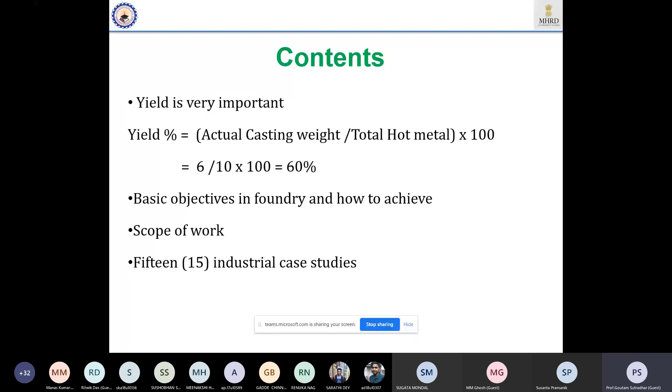If a small foundry gives a product of maximum say 100 ton per month, that means 1200 ton per year. If we think 60% yield is needed, that means yearly he is producing casting of 720 ton. Then the rest, what will he do? Will he throw it away? No, he actually has to remelt it. So out of 1200 ton, 720 ton he can sell, and 480 ton he is rejecting, but again he has to remelt it for further use.

So it will take cost. It will again cost about 48 lakh, that means 4 lakh per month. My idea is that if you want to reduce this loss, then what you have to do is increase the yield.

Similarly, in another way, with 60% yield, still getting 10% rejection, maybe due to sand, maybe due to pattern, maybe due to metal, maybe for shrinkage or whatever defect, say 10%. That means the person is basically getting only 50% effective yield. 60% yield from the process and 10% is rejection, so minus 10, he is getting only 50% yield.

Now the question is, if I can decrease the rejection to 5%, that means average improvement is 5%. That overall improvement means it is earning. So simply it is a calculation. If you make some improvement of yield or rejection, that means also it is an improvement of productivity. I will not take much time on this.

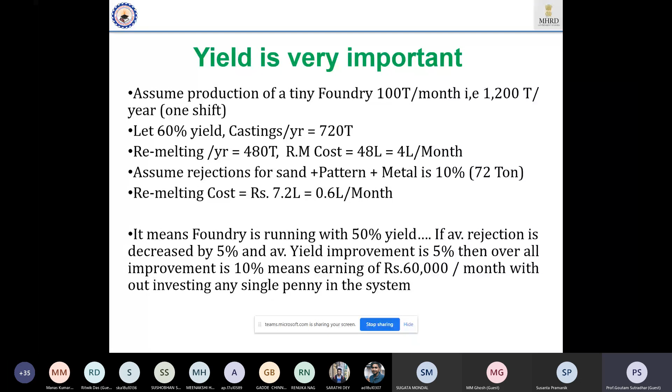Let us go to the actual field. Before that, I am telling you that casting is actually like a baby in a mother's womb, we definitely say, from the pouring to the end of getting the casting. Because when the casting comes out at the knockout, or at the time of fettling, only then can I conclude that this is giving a dimensionally sound casting.

But to get a defect-free casting, it is really challenging, particularly for any material, particularly for steel, particularly for stainless steel, particularly for SG, particularly for aluminium. So what are the basic things I will consider?

I will consider the major thing is proper placing of riser. I will not say much on what a riser is, I assume you know the riser. Riser is one thing. Riser is actually extra metal which is provided into the casting just to compensate the shrinkage, and it should be placed in a proper place and with proper size.

Then apart from these two points, runner length is also important. Then the total feeding system, that means cross section of the riser and runner, which is known as pressurized and non-pressurized gating. That detail you can get from any books, or I will give my email address at the end. And then sand related issues, sand entrapment, and these conditions. So these are the basic things I am giving you.

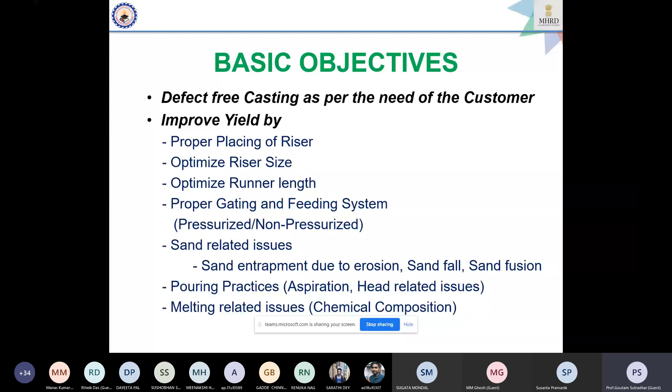After that, I always analyze each and every casting which gives a good result from any foundry. So almost, I think not less than 12 years back, one casting I got, and the company told me, sir, this is a casting which is used — you see, this is big, it is used in a very heavy earth moving element.

You see, it is just like a bearing, a bearing knee type, and this is just a housing. It looks so small, but its finished weight is 250 kg.

Understand? Now what is the problem? A huge problem was coming. The company told me they want to reduce rejection and improve yield, because this is only giving a yield of 46% and rejection of 25%.

That means 71% gone. So the company is only getting 29% sellable castings. This is the chemical composition, I am not going into detail. Now let me tell you what they are doing.

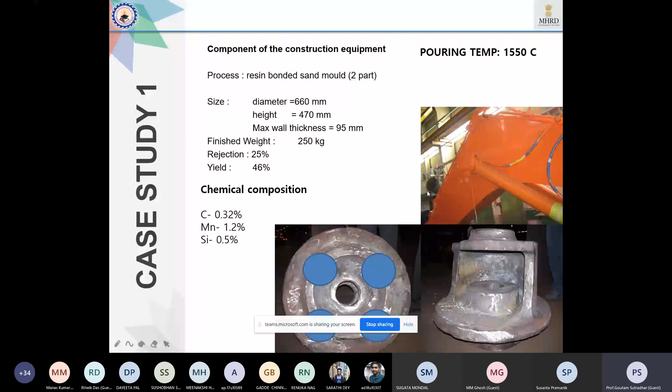First, the pattern is the most important part of any casting. So I tried with this, to see what is the volume of each riser. I made a solid model and saw the ingate is oriented 90 degrees. So assume the total is the mold, and this is the negative part.

That means it is to be filled up by material. So when molten metal comes feeding from the sprue, it comes here, its velocity increases, and it will directly hit this inside core.

You understand, it will be hollow, so there should be a core, and the rest which you see as solid is the hollow part from the mold. So when the material strikes any solid part during its molten condition, it splashes like this.

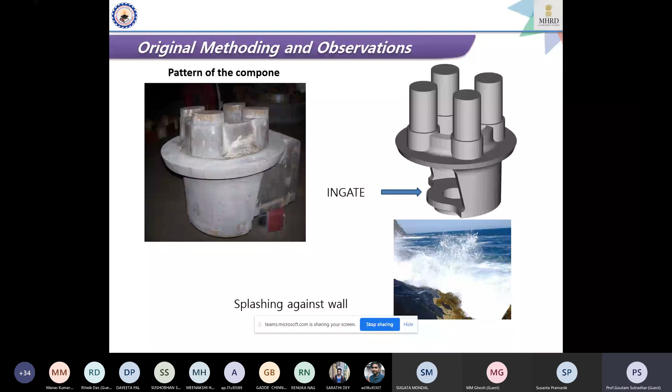So according to that, what is happening now? They are getting a huge amount of shrinkage in this part, particularly at this wall's central part. If you see in this part, there is a huge portion that is unfilled.

So then what they are doing is cutting the thing and then grinding and finishing, and after that a huge amount of rework has to be done, a huge amount.

So what exactly did I do? I first started working as per their condition. Then I thought, no, it is actually on the flange. Just see carefully, it is on the flange.

So on this flange, after knocking out the riser and then grinding work to finish it, it takes almost a minimum of 8 to 10 man hours to finish one casting.

This is called the rework, and after that they send it to the machine shop. As I told you, 71% is lost, 29% is the actual sellable casting.

So now what did I do? I shifted these risers from the flange just to avoid, or reduce, the fettling part. I shifted it a little bit, and I saw this is coming out of the casting.

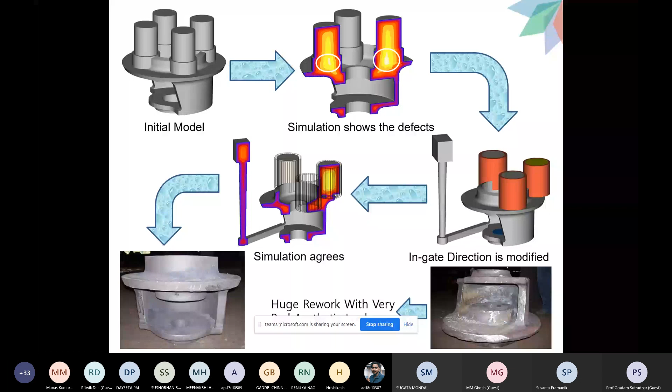Then what is the result? The actual metal poured before doing this work was 540 kg. But after this change, it becomes 465 kg. That means 75 kg savings I have made on one trial for one casting. Now, if we make 100 castings, that is 7.5 tons of hot metal that could be saved.

So the yield was 46%. Now it becomes 61%. So improvement of yield has become 15%.

So this work definitely took me almost about 6 months, because it is not my full-time job. From my teaching, and according to their schedule of manufacturing, I have to go there. I have to stand on the shop floor. I have seen the difficulties, understood the problem, and solved the issues.

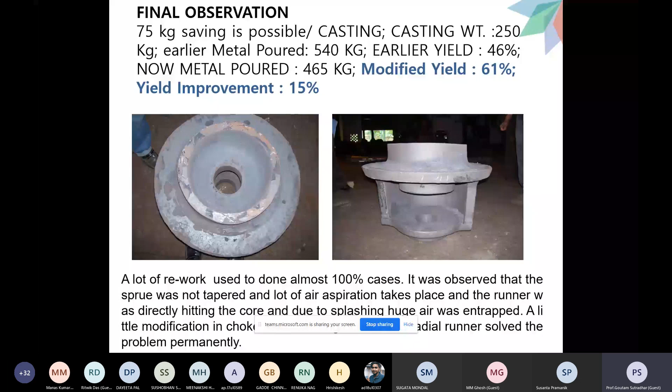So this is another one. I am just asking, is it interesting to the audience? Yes, sir. Okay, now this is my second component.

This is also a very good experience I am just sharing. It is a component used in a textile machine. The machine is being exported by an Indian company. It is basically Calcutta based, but their main factory is in Delhi, and Hugli in Calcutta.

So this component, just see, this is a part. It is a flat plate and then a cylindrical thing, and in between there is a rotating bush, a rotating spindle. After that a plate is there, it is fixed. So this surface and the actual body of the machine should be perfectly matched, otherwise it will be rejected at the spot.

Now, what is the history I got? Particularly, I am just giving you the SG iron composition, what it was, but I'm not going into details. When I went there, I remember it is a fact, it was in 2012 when they came to know that there is a person who could rectify these defects.

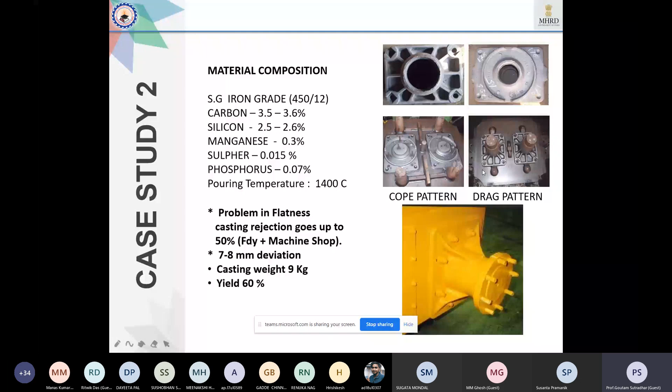So now, what I have seen, when they are pouring, this is the pouring site, there are 4 risers, and this is basically 450 by 12 SG iron grade. I thought about what they are doing, I have seen the simulation, and from the simulation I understood that these risers are not at all useful. And not only that, if these risers are not useful, this zone will be very much hot, because this riser is the last part of the casting to freeze. As it is hot, it will create 4 big hot spots in the sand, which will be hot for a longer time.

What is that? Due to deformation, even after solidification, due to the hot temperature of the sand, it is slightly deformed. That's number 1. Number 2, as these are the last points to solidify, when it sinks, it is taking some metal from nearby. Sometimes metal comes out, and due to that there is some taper or depression, a sinkage visible from the top surface. So I have seen this thing.

Then I thought, you need very good common sense. I thought these two ends, the dimension deviation should not be more than 4 millimeters. Now, the sand density is about 1.8, but the casting density is 7.4 or 7.5. So definitely, if the molding is not proper or hardness is not same in all places, then it will be deformed.

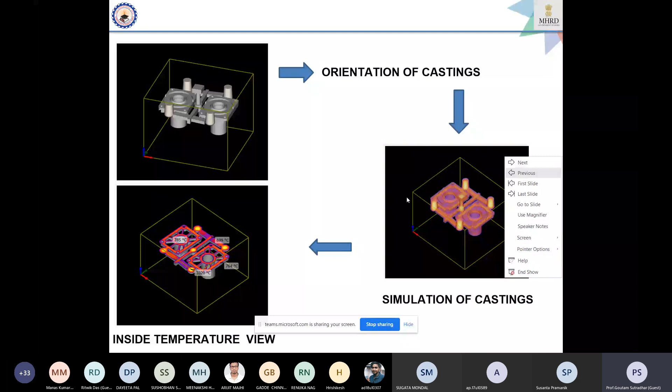So what I did, I changed the orientation. I made the orientation like this - that means I changed it so the top box becomes the bottom box and the bottom box becomes the top box. So this flat part becomes the bottom, and the cylindrical part becomes the top part.

And see, there is no riser. I didn't put any riser because I thought, let me see. I talked to the entrepreneur - let me allow at least 10-15 castings, I will see. When I did it, the shop floor supervisors were laughing. They had thought there were 4 risers needed, and how can this professor do it without any riser, because for the last 5-6 years they've seen that a riser is very much essential. Some people increased the riser size, somebody decreased it, but ultimately there was no effect on the rejection level.

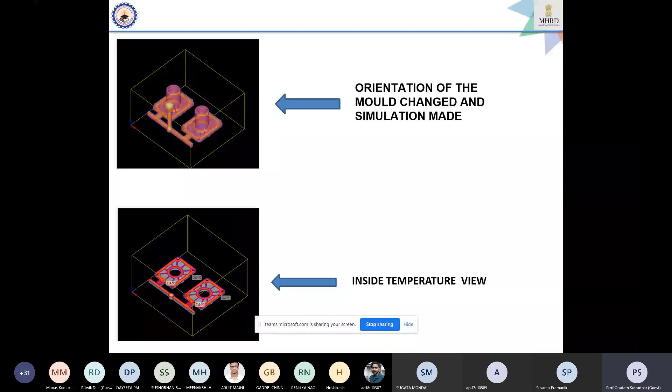But fortunately, this first casting - I am happy to say it is a totally sound casting. And from this image, you can see there is no riser. This is a match plate, I have just removed all the risers. So this becomes one of the first riserless castings of SG iron, each weighing about 9 kg.

And not only that, the gating is modified. Yield becomes 85%. Deviation is controlled under 3 millimeters. Rejection is less than 10%.

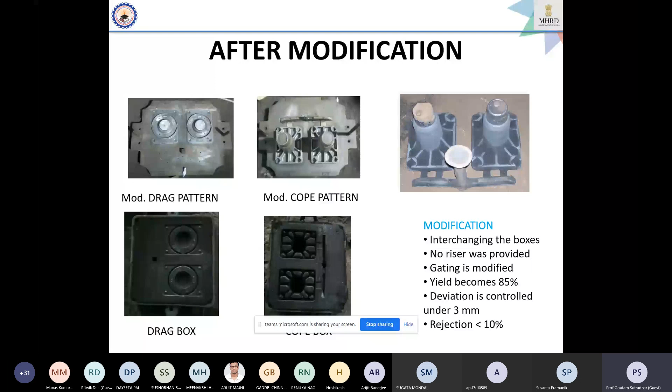This is another one, a very big casting, about 4 to 5 feet diameter, a very big housing - an axle housing. Now everything is fine, but somewhere in the total casting, because it's a hollow housing, there is a huge core inside. The core diameter is more than about 3 feet - it's a very big core. And the axle is very thin, maximum 12 to 15 millimeter thickness, but the diameter is very big. But there is a hair crack from one end to the other end.

So the problem was really difficult to understand, what could be done, because the methoding is okay. I checked other processes, it is fine, but there is only a hair crack, and it is coming up to almost 50% of the surface. From the outside, you cannot understand, but when the customer checks, they are telling it is a hair crack.

So now, this is the trick, and this is the experience. What I did - I understood that the problem may be due to the core. Then the medicine was just to increase the collapsibility of the core.

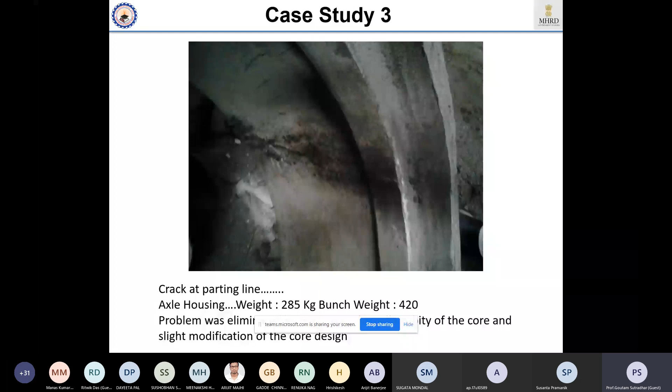stopped. So it's just a concept of what to do. I have not spent any money for that, only some sawdust was included. So this is one story. Now another story is this.

There is a particular component.

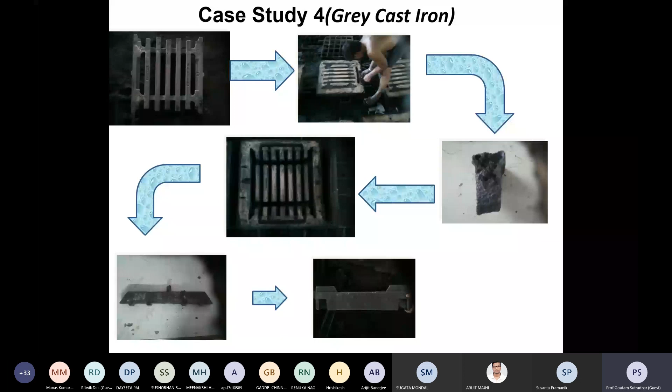So what I did after that, I understood the problem and they accepted this thing. And this is the final product I just showed you, that there is no such issue, see this. If you can magnify this, you will find out the metal is coming, entering through this, and there are no bad elements in there. After machining also, nothing came up. So this has been passed.

This is a product, also a railway product, very costly product. It is a grey cast iron product. It is from a casting company, I can remember it is in Asansol. I'm not taking the name.

And the same thing was happening. No, watch it, sorry. This is also grey cast iron. Sorry, it is also one sort of manhole cover frame. Same type of thing. They are getting some slag at a particular place. Very typical, very particular place during machining, I think in this place. This was something coming and the casting is ultimately rejected.

What I did, I did the only thing. See, this was basically their feeding system. The problem is, you just check it. See, sometimes it is not there, the extension, I think it is not there. So initially they did not make any extension of the runner.

It is an inside runner. Normally we are putting the runner on the outside of the casting, but this casting is very big, so if I make the runner outside like this, the yield will be low. So inside they are making the ingates like this, and this is one position of the sprue, second position of the sprue. So two gentlemen are simultaneously putting the hot metal in this. So I said, you are doing some mistakes because there is no

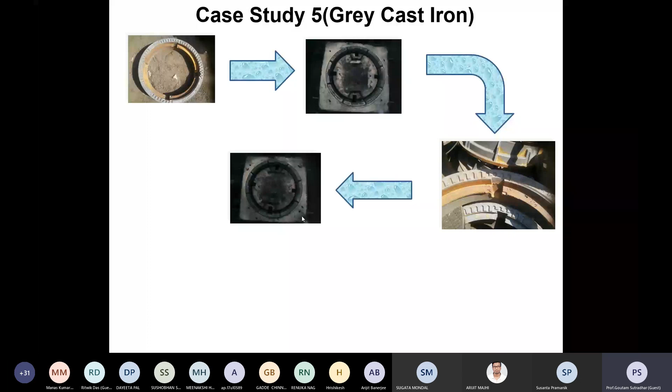So this is another case. See, this is from an Asansol casting unit, about 6 years ago. This is a component of grey cast iron, I think, what I can remember. This is called one sort of, this is about 45 kg weight for a single casting. So I have to first check what is going on in molding, what is going on in the methoding. So they are saying there is no runner work, this is the ingate, and from the top they are pouring. This is a point, okay.

So initially they are sending like this. I just changed the ingate position - you just check, it is just radial direction. I made the thing in radial direction. So the first example, think of it - metal will go inside and flow like this and fill the mold. So first I tried with this just to show them that, when I change from here to here, that 100% casting is not okay. I'm telling you frankly. Then I increased this part.

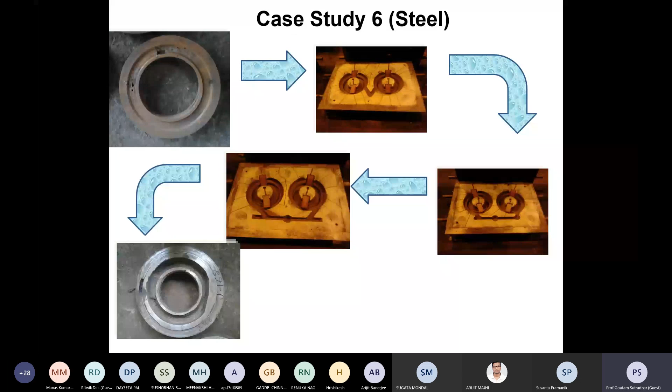I don't know, Dr. Pramanik, is it interesting? May I move further? Yes sir, it is very much interesting, and students should also hear this - we should go for more case studies. So please continue with the case studies, sir.

See, this is the experience from my last, almost 2001 to 2018 - you can see, before joining. Still I am doing this thing, but now it is just like fun. It took more time earlier because I was not running to the foundry from Imphal to any part of the country, but nowadays technology is very fast. So they are actually helping me online also, by video also, but I have to carefully see when I am really free for that.

So again, I want to show a very good example - it takes even more than a year to solve this issue. Case study number 7. It is a small worm gear, it looks very small. In a match plate there are only 4 castings. It is a worm gear, material is steel, so far as I can remember, low carbon steel.

Even after simulation, just think - out of these 4, one of the castings is getting sinkage at the middle, and in the middle there will be a key slot, because this worm gear will be fitted in a shaft, and then a sunk key is being fitted. Now if there is a small discontinuity or hole or any shrinkage, even at the size of a mustard seed - that means 1 millimeter or 1.5 millimeter, even 1 millimeter, I'm telling you - it is a reject. I think it's a handle of a lathe or some machine tool, I think.

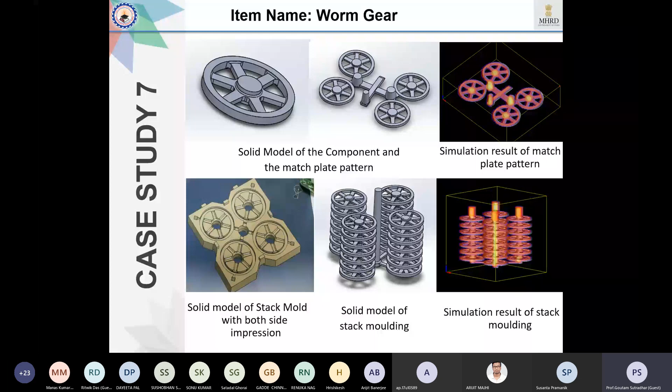So after this simulation, I was really inspired, I was excited. Then I told the entrepreneur, let us go for the practical trial - first I did the simulation. So this was previous, now this has been made by the core shooter.

And similarly, one after another, we put together and make - see, 1,2,3,4,5,6, you see 7 boxes are there. This is the middle pouring, these are the ends where the material is coming out. So we still put a very small riser with some sleeve so that the metal can stay liquid for a longer time.

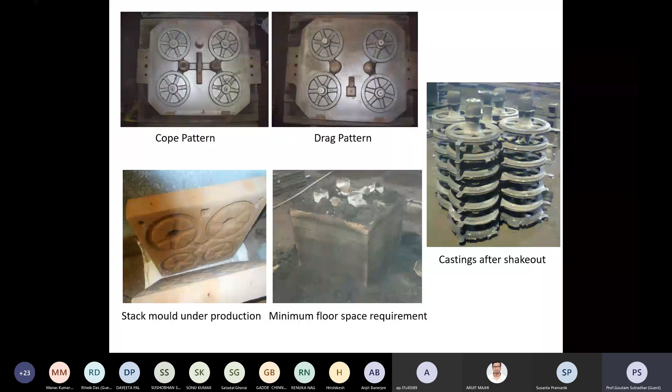After checking, I said don't cut it - cut it in front of me so that I will see it. Then after that, see, you can understand what is coming out. Previously, one bunch meant 4 castings, with actual weight with runner and riser of 20 - that means yield was 48%. Now with the stack molding, it is only 100, and you are getting 28.

You are getting 28 castings.

I thought the yield may be decreased. First I calculated theoretically, then I said it may be around something. So ultimately when I did the cost analysis, leaving aside other factors, it is not much different. If you want, I can show it to you.

So see, ultimately I saw the material cost, everything we have checked, but that rejection is almost nil. I don't know whether I can show you the next page.

Sorry, in this analysis you only see the total cost and other things, shot blasting cost, everything. But I am getting the metal cost rejections. I forgot to include it, but rejection is absolutely nil. This they have been adopting for more than 6-7 years now.

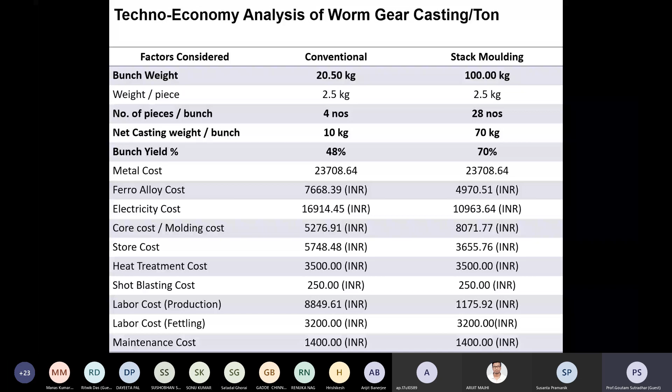So this is another example, a very typical thing. I don't know whether you understand or not. This is actually clipping with the fishplate type. This is a gap where the rail part is there, and it is just put into that.

This is used in American railway, and this part should not be disturbed in any way. And it is so deep that you cannot machine it after casting. Then cost.

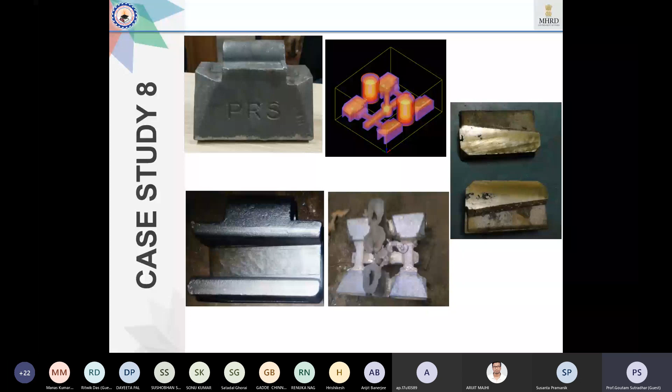Then again, as before, we thought if we could do it in this fashion with a bunch of things, and then let's see, because yield we can improve. So first, this is our first simulation where we made one casting, one riser, one sprue, just to check.

Just see on the left this thing. Then I cut it and saw it is absolutely okay, no problem.

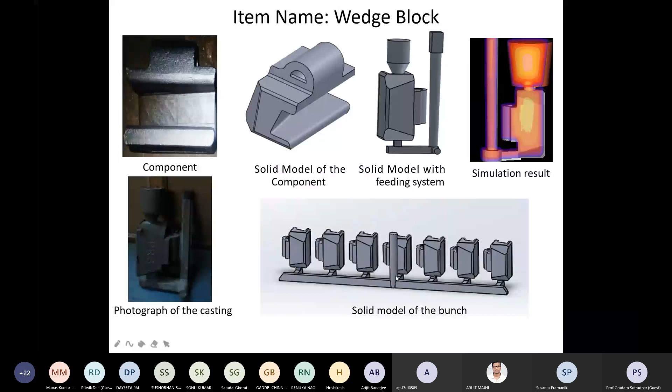Then we made 7 castings with a single sprue and runner, and put the riser every time. So this is a solid model of the bunch.

Then see, I got the simulation, but again I'm seeing there is a hot spot. But then what we did, we changed the - see, you have seen that. Then again we changed it, we did many researches on that.

Then I said, see, if it shows yellow, maybe sometimes it may not be correct. This is an example I am telling you, where the software does not give direct, correct direction to the engineer. So even though it was showing some yellow, I said let us try, because I could not do anything better than this. I surrender, unfortunately.

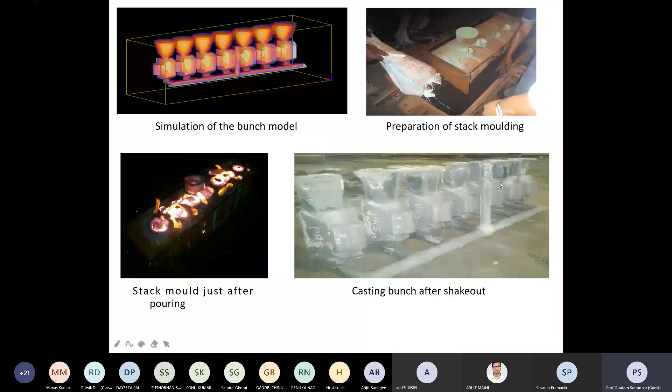This is the photograph I took when the casting was being taken. So this is the casting, and you see all engravings are clearly visible. Customer is satisfied. Then I said, let's go for the cost analysis.

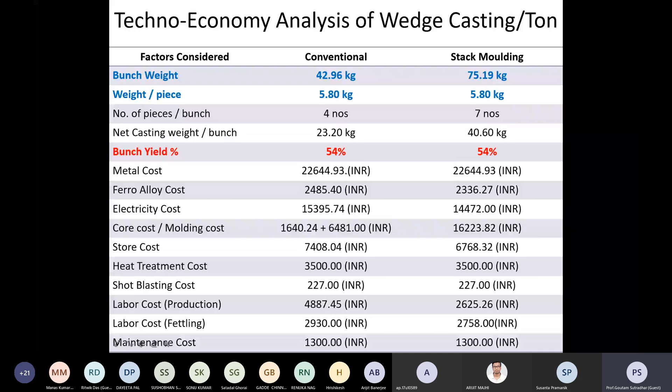See, the bunch weight yield is not improving, in the production yield, in the bunch yield. But when I looked at the rejection, I was astonished. Previously, rejection was about 30%, and it was totally unpredictable.

Unpredictable results give a very, very bad name to the entrepreneur, because some months he is doing very good, sometimes there is high rejection. So they could not fix their productivity in a standard, more consistent manner. Consistency in rejection, whatever it may be - 5, 10, 50 - whatever it is, is very important. So first I can understand, they see 5% rejection.

So cost-wise, we found it is only nominal, just 1.5 to 2 rupees extra. The entrepreneur was glad because processing time also became one-third. But I'm telling you, it took almost 1.5 years, even more, to achieve that. These are very typical experiences in the shop floor.

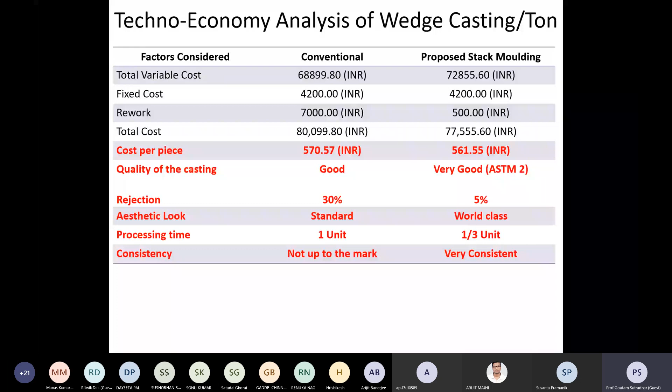If you are curious, this is one casting. The company is far away from this place, near Kalka. They somehow got my name from the Indian Foundry Journal. If you go on some Indian Foundry website, you may see my name listed as a casting simulation expert or something like that. That was some time back, I don't know if it's still there.

This is a component from solid modeling. It is a steering case of a Bolero car, and it has a very, very complicated design. Complicated in casting terms means the surface or thickness is not consistent.

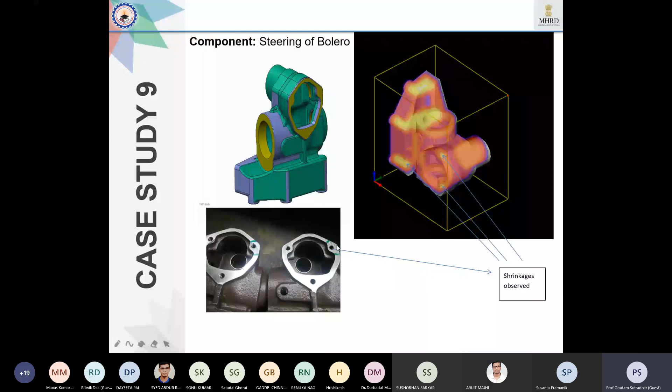So I visited the factory. This is me standing and taking the photograph. Then I said that first of all, this is not correct. But they did not act on it.

First of all, I'm telling you frankly, any shop floor person, when they know he is a professor, they don't know how much shop floor experience I actually have. So first they deny it - 'No sir, kaise hoga? Ye nahi hoga, ye hoga.' They say this problem will come, that problem will come.

Then I discussed directly with the owner. I said I have to take some risk, you have to take some risk too, and I need the chance to operate on this particular issue. If you are ready, I will go ahead. If you are not ready, forget it, I am not taking this case.

So first I told them this thing is wrong. You can ask me, sir, why do you say it's not correct? Because I have seen that these are the areas where the metal is entering. See the cross section - this is not uniform.

Uniform versus non-uniform cross section means, as an engineer or science person, you can understand the velocity of the metal at this place and that place are not the same in the same casting. So this part can fill easily, while this part will fill late. The velocity at this part is very high because of the reduction in cross section.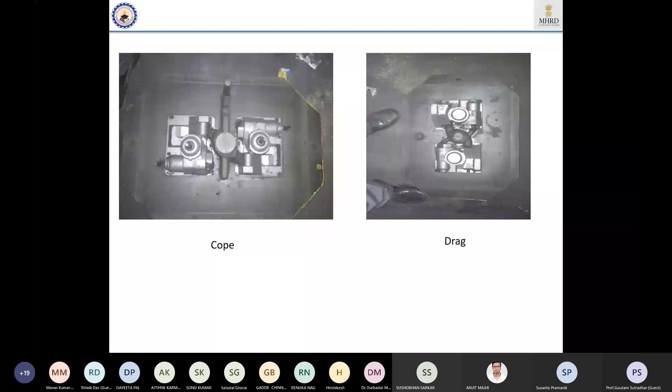So after that, I changed the design. You see, there is no such difference now - it is uniform, this and this.

I said that since the casting is very critical, with difficult cores and a huge amount of metal, I cannot think about yield from a match plate point of view, because this is a very safety-critical item. You have to increase yield by reducing rejection instead. So I told them I cannot give much yield in that - whatever you are currently getting, I cannot improve that part.

The man then said, if you reduce my rejection, I'll be very happy. So I said you have to create an exit path - because huge gas is generated due to the larger volume of core. You have to make a passage for the gas to escape easily. It's nothing complex, just a plate of 2 millimeter thickness that I introduced into the design.

I told them to put as many as possible, so they did it the same day. I was there for a day, and the next day I saw what they had taken - you just take the casting, and after that they sent it, and they were very happy with that. Ultimately they said, sir, it is really good for us. So this is one story.

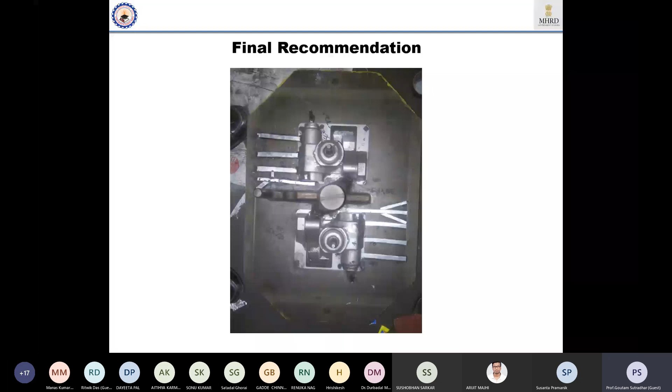This is a part which is very near from here, I think near Raniganj or some company. This is a component which is again being used in railway, for fixing the fish plate. There will be some other parties there - I do not understand exactly why it is used. It is almost 2 point something weight.

The entrepreneur said our match plate is like this, and these are the small risers here, and there should not be any defect inside. I don't think about the yield or whatever it is, but my margin is very low. At that time, this was 10 years back, the margin was only 25 paisa, he was telling.

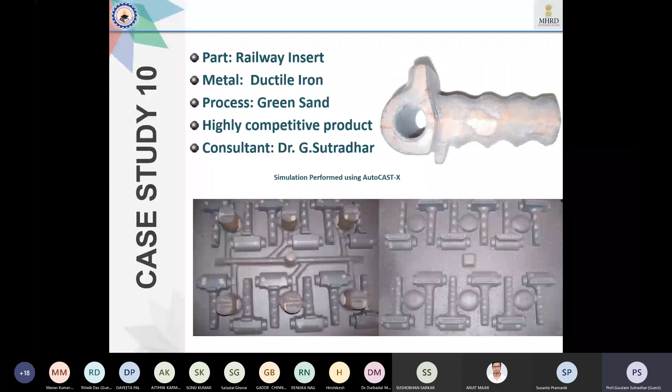Because of the huge count, the company is existing because they are supplying more than lakhs of these pieces per month. Okay, so this is the casting. So what I did - I said, okay, I'm not very sure, but if we change a little bit, I think it can work. He said, you can take any risk. So I started with this, the unmodified match plate with only 12 inserts.

Then I thought, can you just put one component in this part? But there is again a chance of entering slag, so you have to do the slag removal - a very, very good process with a very expert ladle maker, meaning who is actually skimming out the molten metal before pouring. So they said, okay, we'll try, because this is our bread and butter. If we don't improve and increase our profit, the company will lose.

So with the same match plate, I put two more inserts - instead of 12, I made it 14. Ultimately, they were very happy. I am not going into details about the methoding - I am not changing anything.

Only by chance I thought that if I make it this way, sometimes you may get scrap, but I have no choice - I cannot help you with anything. But simulation said make it metallurgical, it will be okay. If the slag enters, I could not do anything, because I have no scope of escaping the scrap from this match plate. There is no space to escape.

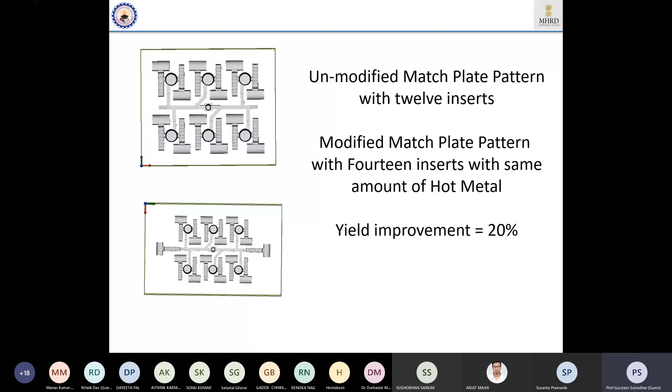So next, it is a very good story. At least if you want to finish me here, I can finish, but I don't want to get relief if I don't tell this story. This is a story maybe 15 years back, when I really started consultancy work, in 2005 or 6, I think, minimum 15 years ago.

The foundry is making that kadai, which is made of cast iron. Suddenly the entrepreneur called me, sir, I am getting kadai which is unfilled. Everything is okay. Metal temperature is okay. I said, how do you know that your temperature is okay?

He said, I am doing this for almost my whole age. When my age was 10, I am now more than 60, so for the last 50 years I am standing in the same foundry as the owner. At that time I was a child, now I am an old man. So I am saying, I know that temperature is no problem. I said, your sand quality - the same person is doing everything fine.

Then what is happening now? I am trying to fill, but it is coming jali - meaning it does not fill the full surface. Okay, I am not going into details, because I do not know exactly how it is, just a hemispherical shape. One is the positive part, another is the negative part, and the mold is made like this, and metal is being poured.

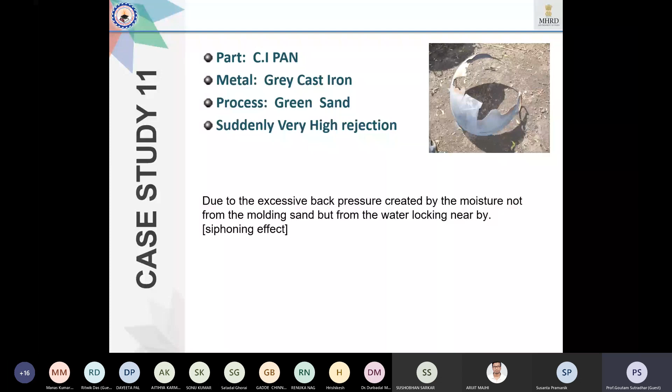So, gentlemen, another 4-5 cases are there. Okay, hello Professor Paramanik - am I close here, or are people getting really interested? Another 5 cases are there, but they are very small. So should I complete it, or should I move to the next slide for the smart foundry topic, or close it here? Smart foundry I will take only 5 minutes.

Can you ask your students whether it is interesting, or tell me yourselves? Otherwise I will close down in the next 5 minutes. Yes, the students are there to answer - you just ask them, it's your students, not my problem, you're the teacher, ask them if it is making any sense. Then I will continue, otherwise... Sir, another five? You continue this for 2 or 3 slides and then move on to the smart foundry part.

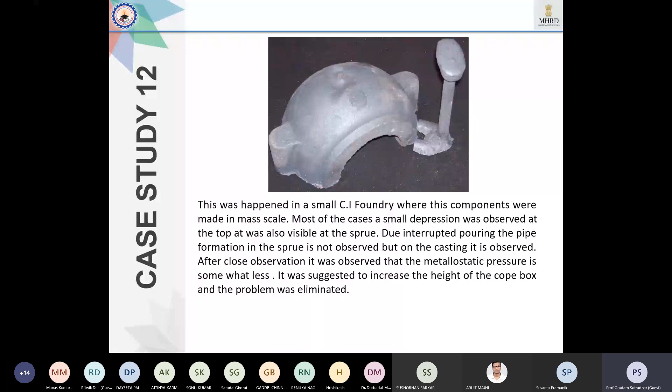This is inconsistency in mold pouring - sorry, mold consistency, meaning the compactability.

I think people who are reading foundry know this. Sand compactability should be around 45 plus minus 2. If the compactability is not there, compactability is the index for making the uniformity of the mold box.

If it is not there, you may get, it is also a component like a pan, the kadai. It may be making hollow like this. From the outside you cannot understand, but when you crack it, in between you will see it is not filled like this. This is because of compactability, because cast iron has graphite formation and tries to expand, and when it expands, it creates this type of problem.

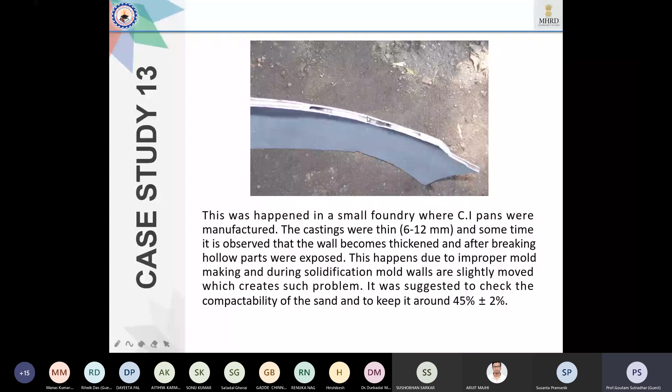So again the same problem I said in case of hair crack applies here, you have to improve the collapsibility of the core. This is the last case study, I think.

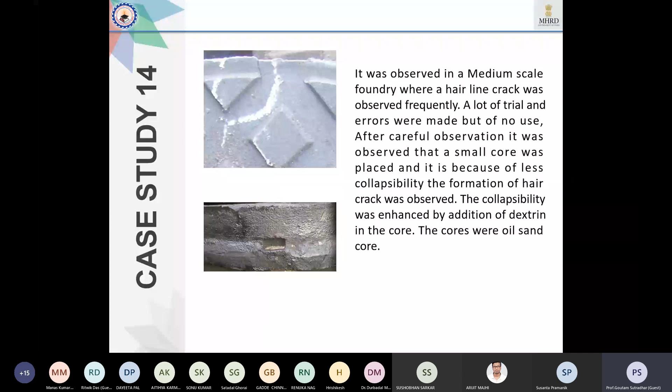This is my first consultancy in my life, in 2001 or 2, I think. I just came, it's a long story, I'm not going into that. Only thing I have seen is that this is a match plate.

At that time I was not doing simulation, I was doing hand calculations and other things. But that company was doing simulation. In 2001 I first saw, in Howrah there is a foundry, it is now a very big foundry, but at that time it was very new. I saw simulation at that time.

I saw one very peculiar thing: everywhere they thought they were getting some shrinkage, they were putting some sort of riser and again some knockoff like that. So an enormous number of risers you just see. Now the casting distribution was haphazard, no proper distribution. Metal is coming here, one side producing 1 and 2, other side producing 1, 2, 3, 4, 5, 6.

Ultimately I thought the yield is 47%. Not only that, it goes down because high shrinkage is also coming, at least 1 or 2, because this number of risers is actually working enormously, but with no prediction, nothing.

So this example, I found that in nature, if water is coming from different sources and merges somewhere, then some splitting takes place. As I said in my first slide, the behavior, the flow inside the molten metal inside the mold, is very very important. It is only common sense, I am not going into any theoretical issues. That is why I'm telling you, I will just give the story and experience of my life.

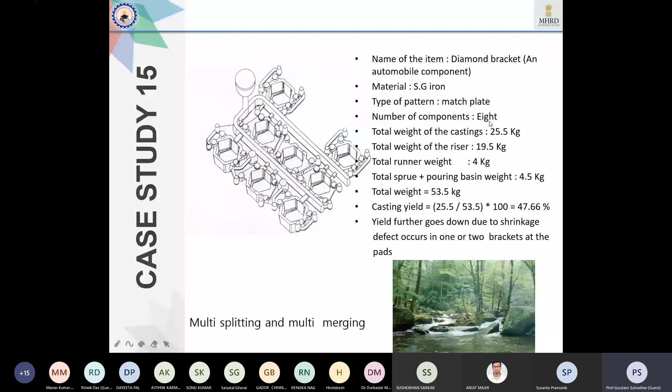Instead of this, their casting yield was this, and the number of components they were producing was almost 8. Now I am making 7 components, but with improved yield and no shrinkage. So ultimately he has taken it.

So I think these are some riserless castings I have made for SG iron, particularly 507 grade, and see the yield. These are all done over almost the last 4 to 5 years, from say 2014 to 2018, before joining NIT Manipur. So this is the thing.

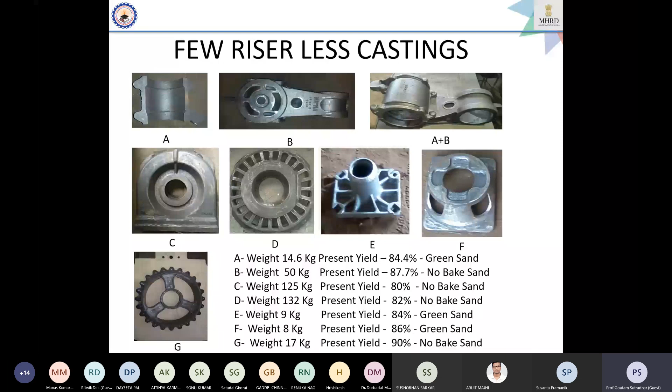I think I am coming to the end of this chapter. If you are really interested, I'll show another one slide for just 5 minutes, if you're interested, it is on industry.

Dr. Pramanik, I'm just giving 5 minutes for this. Yes, IoT, sir. Yes, sir, yes, sir. You continue with the smart mode.

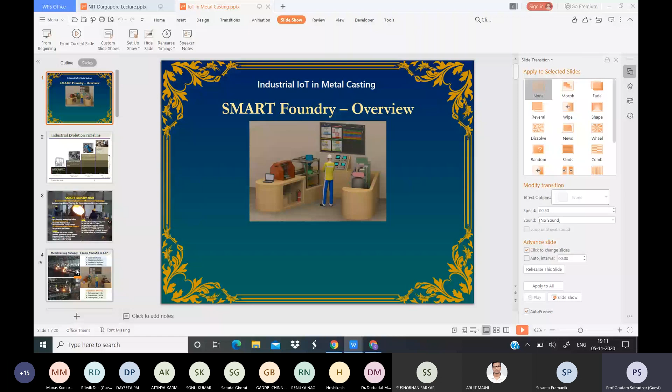This is smart - it means it is not that it just looks smart and other things. Smart abbreviation is that, from the third slide I can show you, sustainable metal casting by advanced research and technology. Now, I don't know whether you understand Industry 4.0. Industry 4.0 means Industrial Revolution 4.0.

When our forefathers started their life regarding the earlier part of civilization, they could do everything by their own hand.

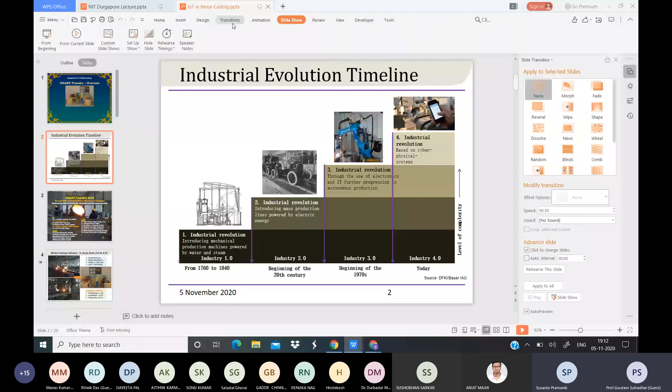When mankind first starts, that mechanical production with machine powered by water and steam - the steam engine just evolved, and then people started using the steam engine for machines. So this is our first industrial revolution.

The second industrial revolution came about almost 100 years after. At that time, people said if production continues like this, the component production rate is not very high, so we have to go for mass production. It is basically repetitive production, with main concentration on repetitive production.

Then again almost 70 years after, the computer is attached with the machines - machine tools, CNC lathe, CNC milling, CNC drilling, CNC laser. Now it is becoming computer numerical control machine. Initially NC, then CNC. When this era, when CNC came into the picture, we called it Industry 3.0.

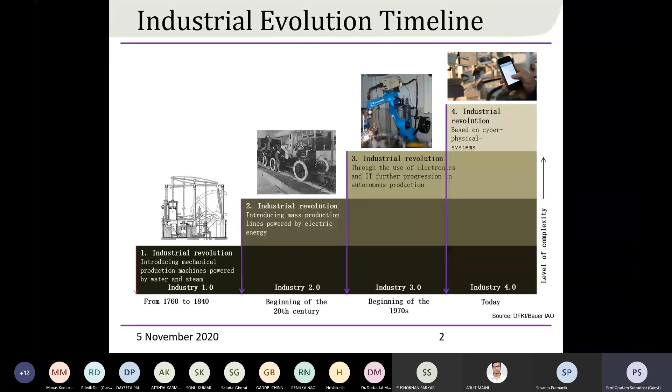In India, truly speaking, this is a project given to a group of faculty members, and I was a part of that. There were 4 principal investigators and 16 faculties from different engineering colleges and institutes - IITs, NITs, Jadavpur University - with 4 PIs and 12 co-PIs. I am just showing you, for your information, the 4 PIs and the co-PIs.

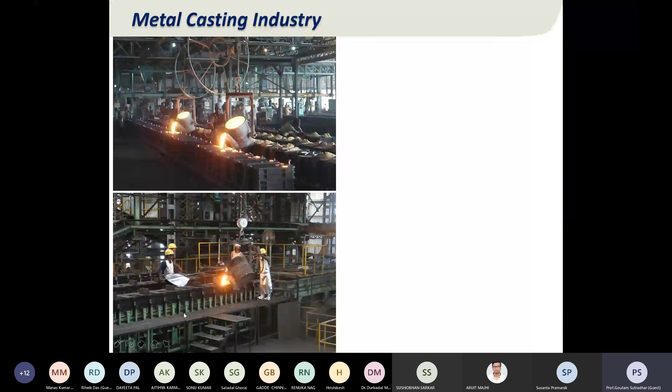After that, some industry partners also joined, with 10% funding coming from industry. Now I am going to show you the most important slide.

See, this is the industry even 40 years back, and even today it is still moving like this. Nowadays it's a little bit modernized, pallets automatically moving in one constant place. So you can see the change from here to here. But now our future industry should be like this.

This is our project. It is not completed so far. Here with 16 faculty members and about 30 research workers - JRFs, now SRFs - still working. It is already in its first phase, and the government's DST has already seen this thing, but only a demo version has been shown to them. It was a zero version.

From the starting it's a CAD model, from that a pattern is made by 3D printing, and then a mold is made by no-bake molding, and then the methoding could be checked by simulation, because it is part of digital manufacturing. It will be manufactured, it will be simulated, and we get conformity of that.

So this was the zero version at IIT Bombay - this is the tabletop furnace, an induction furnace of 1 kg capacity. This is the mold box, manual, and if you pick this thing, metal will drop.

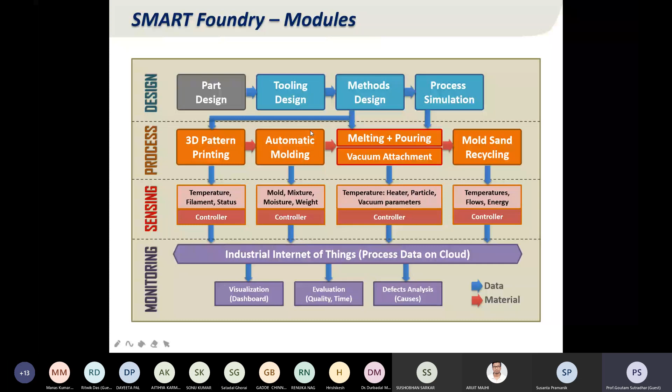But after that, version 1 came. These are the background and design parts, all clubbed together - the sensor part, the monitoring part.

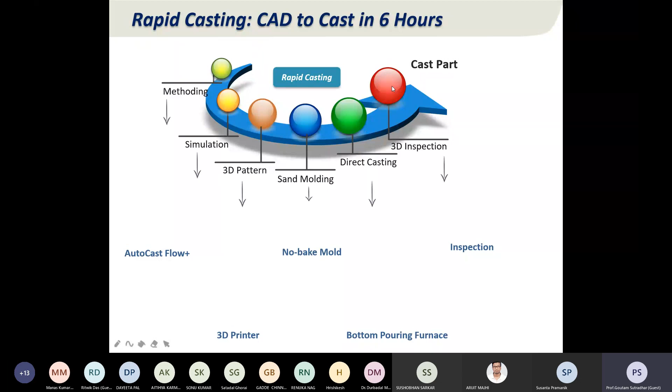Now the last slide, just 2 minutes I will take. In this rapid casting process: methoding first, then simulation, then 3D printing, sand molding - it is no-bake sand - then direct casting, and then 3D inspection. So far this part is not being added into the actual system; it is our plan. I am not going into details.

I'm going almost to the last slide, just to save time. So this is the component - it's a micrometer screw gauge, because this system was particularly instructed by our DST that initially you should go for only two alloys, aluminum or magnesium, because they are low melting alloys, and you have to take very good precision casting.

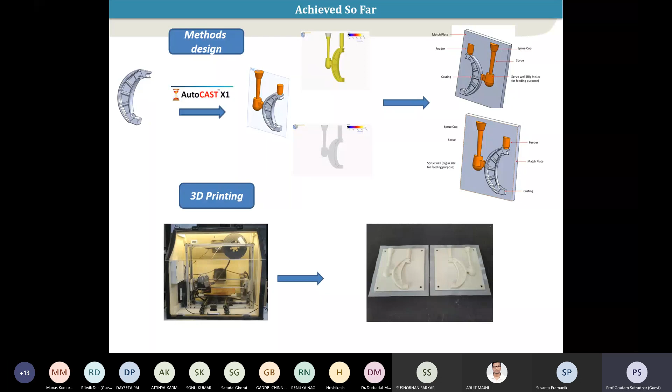So this is the body. This is the casting. This is the modeling after the simulation is done. This is the 3D printing, done indigenously by some of the participating institutes, and this is the no-bake mold. So this is the total picture.

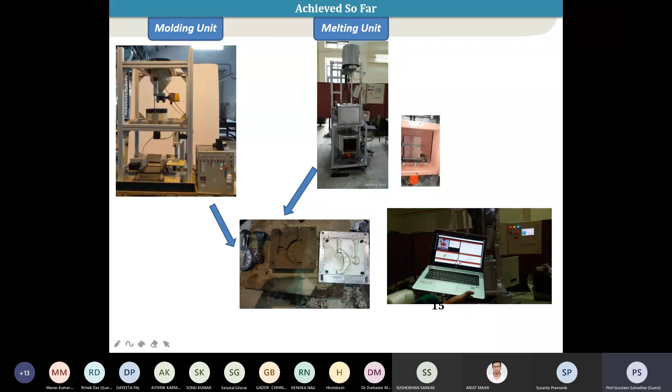This is the automatic molding machine. It was initially developed in CMERI Durgapur, and after that CMTI, and this has been the molding unit. It's basically also a composite can be done, because composite is another chapter of this total project. This is the vacuum chamber, there is a furnace, so the mold is being prepared like this, and the whole thing could be monitored and seen on the computer. I think this is the last thing.

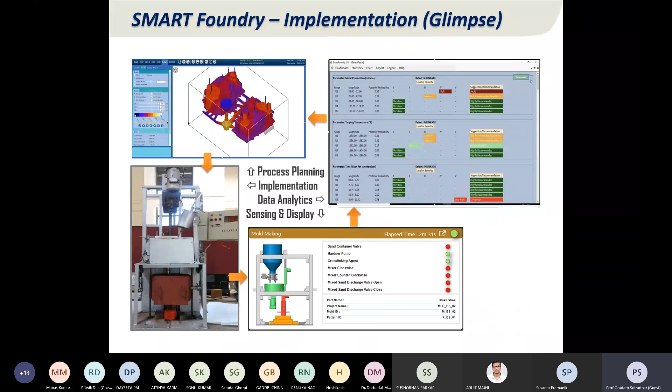So I thought I would go back to the first slide. This is the basic idea of the smart foundry - suppose this signifies that CAD, the drawing came from the customer, and the part maybe maximum 1 to 2 kg, then the CAD model could be done here.

Then this is the part where 3D printing is used only for making the pattern. Once the pattern is made, the mold is produced here - no-bake sand, this is sand mixing by no-bake, and then all sensors and other things are controlled. One particular man who knows how to handle it can control everything from this dashboard. So this is one part, and after that he manually moves the mold box from here to here, and this is the melting unit.

As it is no-bake sand, you know reclamation is required. So this part is not yet done, but we are trying to do it. And after that, the radiographic analysis - this is also not done so far.

So the basic objective is that it will make small batch sizes, it will be rapid manufacturing process, quality sand cast, cost less than 3D printing. You can question, why are you not going for metal 3D printing? Because metal 3D printing cost is very high. This process can replace it, or be much cheaper than 3D printing metal.

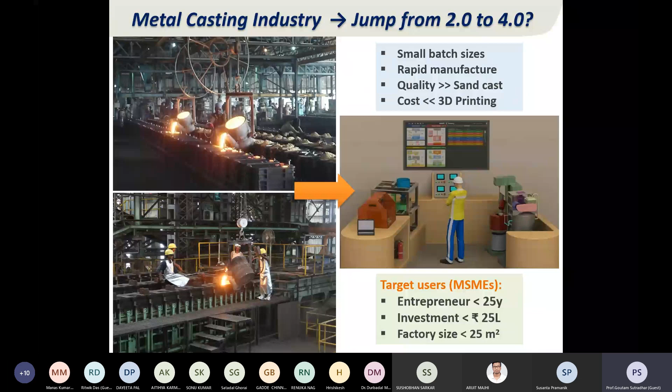Thank you very much. I'm just giving you the concept. You can ask me, sir, why are you proposing this small component?

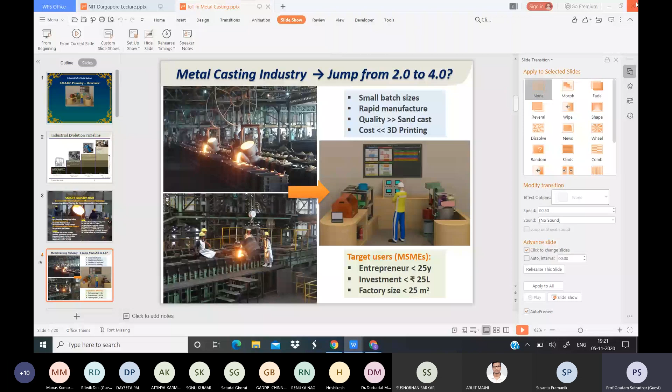The idea is that this type of component, what I've shown you, the micrometer body, maybe 50 or 60 grams - big companies will not be interested in casting such small components. There are many such types, like your laptop hinge, which is zinc alloy. I remember one of my laptops, I changed the zinc hinge 2 years back - its weight is maximum 45 to 50 grams, but it costs around 2,800. So it is not the cost by the weight, it is cost by the finishing, cost by its usefulness, cost by its challenge in manufacturing.

Thank you so much. Very briefly, I've given the idea of two issues. The first one is completely indigenous, and it is my idea which I have shared with you. The second, actually, I am a very small part of - even officially I am not part of it, because this project I have handed over to some of my faculty colleagues in Jadavpur University.

I am sharing this with you to share the concept with the young generation, the future engineers. If you are really interested, I think the government will allow us after 2-3 months. The proposal is that it will be given to some IITs, polytechnics and engineering colleges, maybe 300 of them. I don't know exactly, but there is some policy to make this on a mass scale and give it to all colleges. So metal casting should come to the college level and will be done very easily. Small components can be done within a day, 6 hours is sufficient. A man can work on this even if he is not very expert in it.